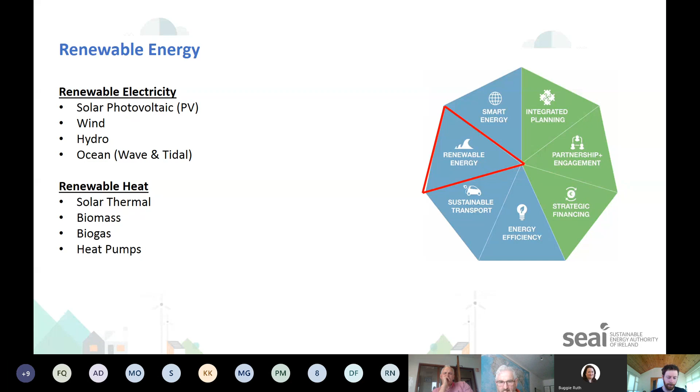Renewable electricity is part of renewable energy, so we've split it into two: renewable electricity and renewable heat. We're going to give a webinar on renewable heat tomorrow, but today we're going to focus on renewable electricity, because there's so much in renewable energy we've decided to split it into two. So when we talk about renewable electricity, in general terms we're talking about solar photovoltaic, wind energy, hydro, and then ocean, wave and tidal. If you want to join the webinar tomorrow on renewable heat, we're going to talk about solar thermal, biomass, biogas, heat pumps, and a little bit about district heating also. So we'll plough on now with renewable electricity.

So when we're talking about renewable energy in the community, in broad terms, this is what it might look like in a small village in Ireland. You can see at the bottom right of the picture, your community might look to install some solar PV panels to generate electricity, and it can work very well in petrol stations, 7-day shops and cafes. Then some of the homes in the village might look at installing solar thermal for their domestic hot water requirement. The local hotel or large B&B might look at a biomass boiler, and the local farm might be a location for a biogas plant, which could then produce gas for heat, fed into a number of homes in what we show here as a small district heating scheme. District heating just means you can use one boiler instead of 10 separate boilers for each home. Then another set of houses might decide to install heat pumps, but they would have to ensure their home is of sufficient energy rating and air tightness, so they might need external insulation or roof insulation to make the heat pumps viable.

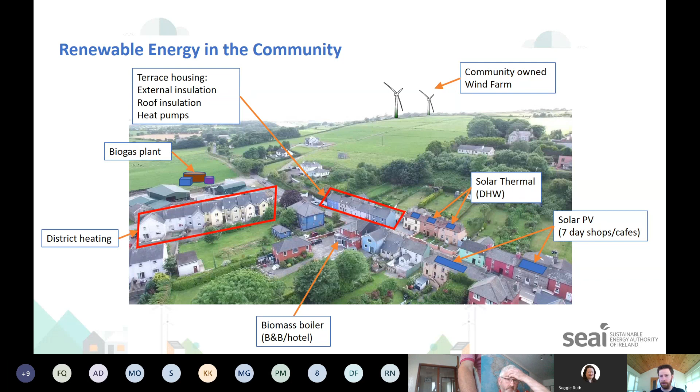As the community develops these small scale projects, they might then look towards something larger, like a community-owned wind farm, and we're going to talk a little more about that through the new Renewable Electricity Support Scheme. Not all communities are inland, some are on the coast, so there's been a lot of discussion in the news about offshore wind farms being the next big part of renewable electricity generation in Ireland. There's also the potential for wave generators and tidal generators. I'll talk a little more about them, though they're not fully mature technologies, towards the end of the presentation.

So just a little bit about targets and policy and why we're doing what we're doing.

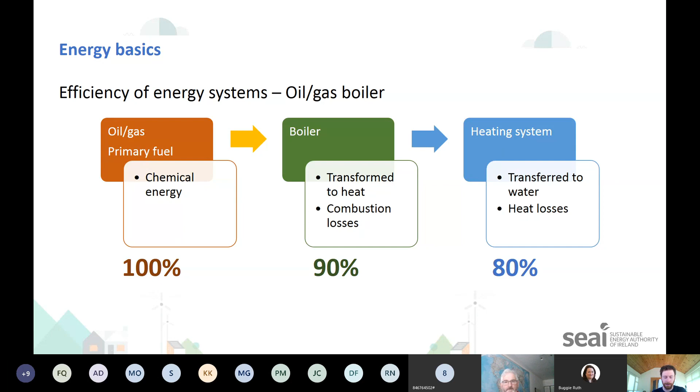Just to give another example in terms of electricity generation, this is an example for a wind turbine. On the left-hand side you have the kinetic energy of the wind, and theoretically there's 100% energy in the wind. As it passes through the turbine, there are usually only 3 blades that can capture that energy, and we have some aerodynamic losses there, so you go straight away from 100% energy in the wind to 55% collected by the wind turbine.

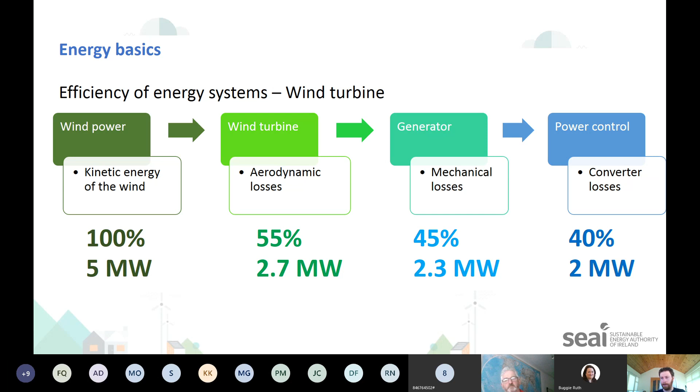The wind turbine then has to take that energy into the generator, and again there are some mechanical losses. From those mechanical workings of the wind turbine, you have to provide electricity to the grid in a usable form - you can't just spill it onto the grid, it has to be suitable for intake by the grid. Once it gets to that stage, you only have about 40% of the energy left from that potential 100%. So that's a little bit about the efficiency of energy generation.

When we talk about energy units and quantities, these terms are often mixed up: work, energy and power. Work is the provision of heat, light or motion. Energy is what we need in order to do work, and we measure energy in kilowatt hours and megawatt hours, and joules as well. Power is the rate at which work is done, which is energy over time. So if we're talking about the power rating of something, we're talking about a 60-watt bulb or a 500 kilowatt electrical generator - we talk about watts, kilowatts and megawatts for power.

Just to give some typical household energy consumption figures, a typical house in Ireland will use approximately 11,000 kilowatt hours of thermal energy, so heat energy, and then about just over 4,000 kilowatt hours of electrical energy.

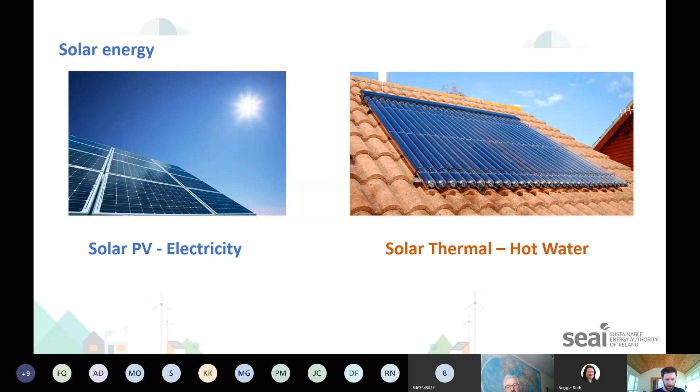Okay, so we'll talk about solar energy. Generally with solar energy, we talk about solar PV or solar photovoltaics, which generate electricity. And then you might see the other ones on the right-hand side of the picture here, solar thermal, which provides hot water. I'll talk about solar thermal tomorrow in the webinar, but now I'm going to talk about solar electricity.

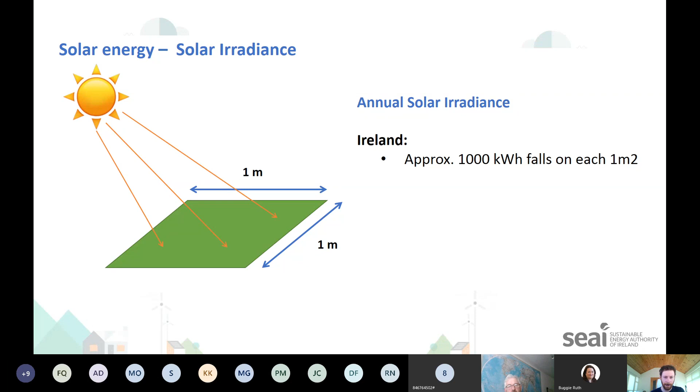So when we talk about solar energy, we're talking about how much of the sun's energy is landing on 1 metre squared of Ireland at any one time. Approximately 1,000 kilowatt hours falls in every 1 metre squared in Ireland, and it's our ability to capture that energy into a useful form that's really key.

This table just shows, depending which way your solar panels or the roof of your house is facing, the ideal scenarios for how you should install solar PV panels. So ideally they should be installed, I've highlighted in orange here, at a 30 to 45 degree angle, which most roofs will be in and around that angle.

And obviously you want it to be south facing. You can see there on the right hand side of the table, the north facing, the last column. Even if it's the right inclination, you're only going to get 500 or 600 kilowatt hours of energy, and it's not really enough to make a solar PV installation viable. So you're looking for that south facing 30 to 45 degree angle. Southeast, southwest is fine as well.

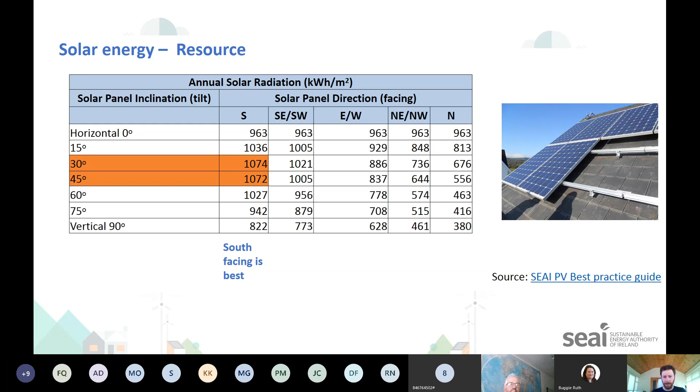And then just some of the considerations. Solar energy is intermittent, but it is predictable. It can be used to supply your hot water in the summertime, and it suits a high summer electrical demand, which many buildings will have through cooling or refrigeration processes. It doesn't really suit space heating because of the amount of thermal energy required for that.

It doesn't suit schools because schools obviously are on summer break, and they're on even a longer break now. But again, there's potential there through possibly the microgeneration scheme, when and as it gets developed, that schools could find an alternative source of income through installing solar PV on their roof and then supplying that to the grid and generating income.

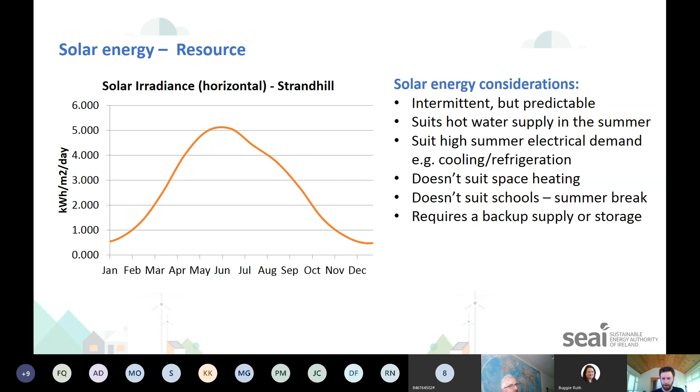So just to give an example then of solar PV electricity: it is generally made of semiconductor material, silicon, and it converts light into electricity, and it's about 15 to 20% efficient depending on where the panels are or the type of panels that are manufactured.

It can either be installed on roofs or in fact on the ground, and you also need inverters to change the direct current electricity, which is how it's produced, into alternating current energy, which is what the grid wants and what your house wants.

So just the capital costs: a small system might cost about 1,500 to 2,000 euro per kilowatt peak, and a larger scale system might cost 1,000 per kilowatt peak, for obvious reasons, for economies of scale in that. It has low operation and maintenance costs, and at the moment SEAI are giving out a grant of 3,000 euro for domestic solar PV systems that include a 4 kilowatt peak system, and it includes a battery as well. And then through the Sustainable Energy Communities Energy Grant Programme, there's potential for between 30 and 50% for a non-domestic setting.

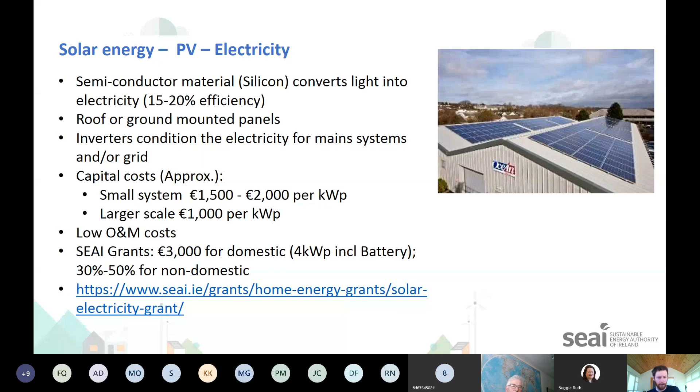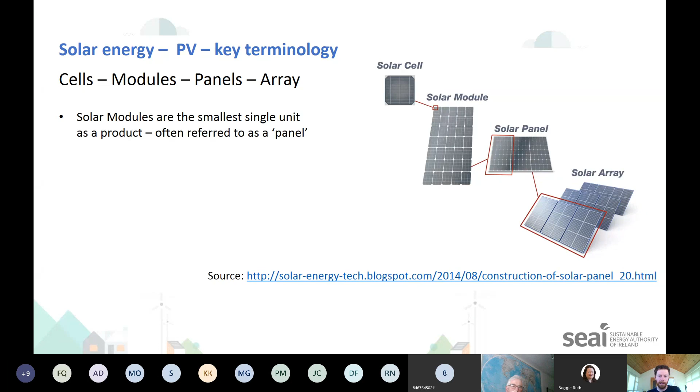Again, when you're considering solar PV electricity, you might want to consider some energy efficiency measures first. This is just some of the terminology around PV panels, the cells, the modules, the panels, and then the arrays. So you can look at that in your own time, I won't dwell on it.

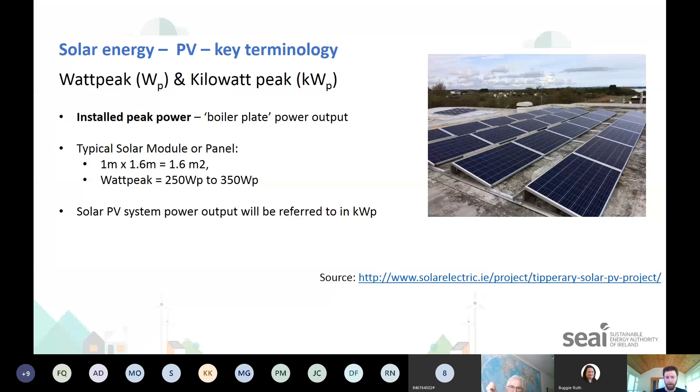And then just in general terms, your average solar module or panel measures about 1.6 metres squared, and in that 1.6 metres squared, it has the ability on a very nice fine summer day to produce between 250 watts or 350 watts of electricity, should the conditions be good or perfect.

Here's an example. If you're conscious that some people are already on the SEC network, some are considering joining, and some aren't on it at all, they might just be interested in looking at this presentation. But if you are a sustainable energy community, or thinking about it, you're likely looking at carrying out an energy master plan for your community.

Within that energy master plan, you can get your energy consultant to identify the best sites in your community for solar energy. You can identify and rank the best potential sites and buildings, such as 7-day businesses, places with summer demand, shops, hotels, nursing homes, even swimming pools. Then that consultant can look at a basic solar PV specification and commercial estimation, and if that comes across as a viable investment, you can talk to those building owners and see if they want to participate in the SEC.

And this is how you start to form a community project. That's just an example of how you're linking up some of the different competencies that we talked about at the start.

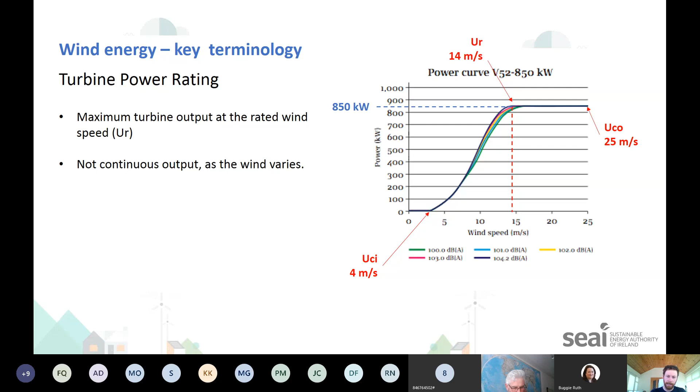Obviously the wind speed can increase up to 15, 20, 25 meters per second, but the turbine will still only produce 850 kilowatts between wind speeds of 14 and 25. After 25 meters per second it's too dangerous - there's too much load and torsion happening on the turbine, so they will turn that turbine out of the wind as best they can, and it becomes unusable. So it just gives you an idea that at different wind speeds, different power is produced.

Capacity or load factor is often talked about. So again, we talked about the theoretical amount of power available in the wind, but how much of that are we actually capturing at any one time? Theoretically, an 850 kilowatt turbine operating 365 days a year, 24 hours a day, can technically or theoretically provide 7 million kilowatt hours per annum, if there were perfect conditions. But in fact, the actual output is about 30% of that.

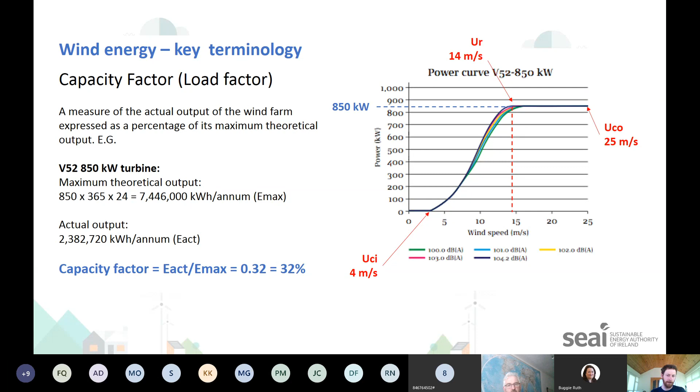And we call that the capacity factor. This is generally the figure for most wind farms, about 32% capacity factor.

Some of the capital costs then, if you think about it per megawatt, can be up to 1.5 million per megawatt - again, it depends on a lot of different factors. Within that, you're going to have an operation and maintenance cost of 1.4 cents per kilowatt hour. So you have to balance that against the cost of what you might be getting through the new Renewable Electricity Support Scheme.

So within the REFIT, the Renewable Energy Feed-in Tariff, which is now closed but is still operating for whoever signed up to it in time, you can see large wind over 5 megawatts will get 7 cents per kilowatt hour of energy produced. This is just some activity you can do if you're looking at doing an energy master plan and your community might be interested in the Renewable Electricity Support Scheme and wind energy.

You might be able to take this into consideration, and it's an example of using the competencies for a renewable energy project or community energy project. So then offshore wind turbines, just a little bit about this. It's no secret Ireland is one of the best resources in Europe for harnessing offshore wind, and the east coast of Ireland has sufficiently shallow water depths to allow for fixed foundation turbines.

Some floating structures are coming into play now. There's some operating in Denmark, so it remains to be seen how well they can cope with the extremities of the sea. In the Offshore Renewable Energy Development Plan, Ireland has the potential to produce up to 4.5 gigawatts, that's 4,500 megawatts, of installed capacity offshore by 2030. That's enough to power about 4.5 million homes per annum. There aren't even 4.5 million homes in Ireland, but it's just to put it into context to say that's how much power is out there, and we should and would be able to export that to Europe in the future.

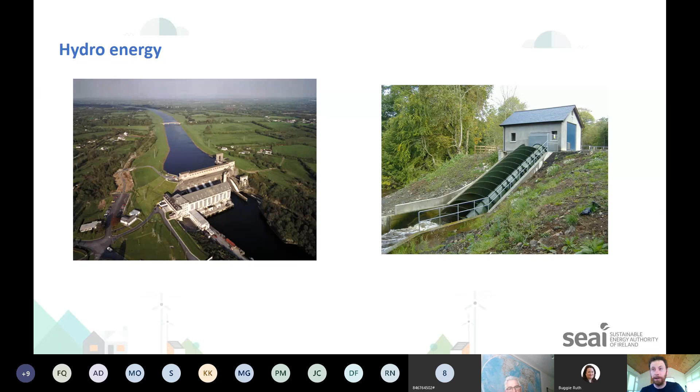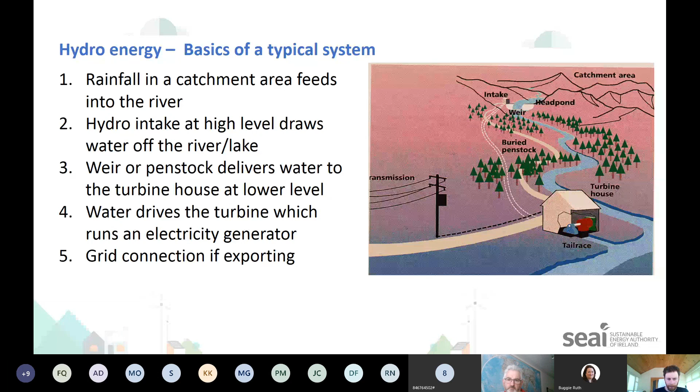So just a bit about the basics of how hydro energy works. The picture on the right shows the catchment area, the intake, the head pond, the weir, the buried penstock, the turbine house, the tail race, and then right down to your transmission. You have rainfall in your catchment area, maybe up high in some mountains, which feeds into a river. The hydro intake at a high level draws water off the river or lake that has been formed, and then the weir or penstock delivers that water to the turbine house at a lower level. The water drives the turbine, and that's how we generate electricity, which is then exported to the grid.

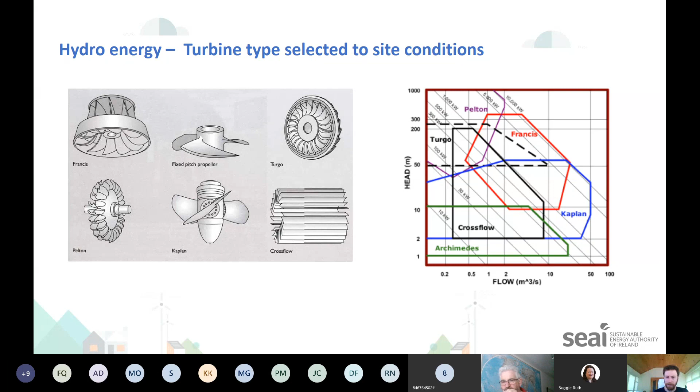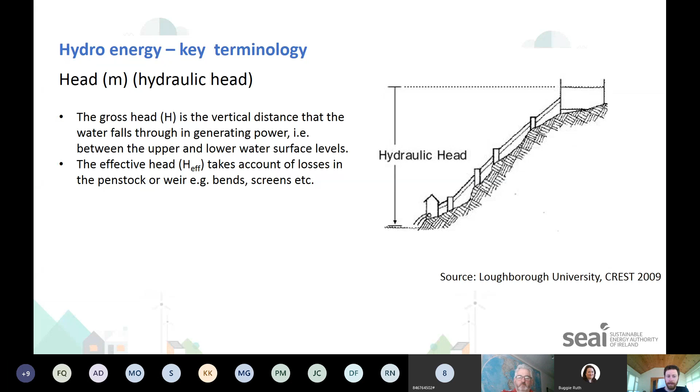What are we talking about when we talk about the head height, the hydraulic head? It's the vertical distance that the water falls through in generating power. The effective head takes account of losses in the penstock or weir, such as bends or screens. And obviously, any hydro power station is very much reliant on the flow of water, which is the amount or volume of water passing a given point at a given time.

There's some very useful information out there through the EPA and our hydrometric stations, if your community is considering it. It's at the moment thought that the majority of potential for large-scale hydro projects has already been developed in Ireland, but there may in fact be some suitable sites for smaller scale communities or small towns and villages in Ireland.

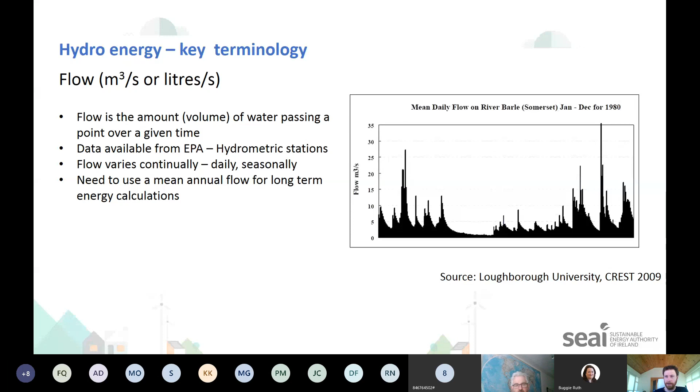So again, depending on the time of year, your hydro plant will produce a lot. Obviously, if it's raining a lot, more water, more flow, more energy, more electricity produced. So when you're designing these things, you have to consider everything, like what the water flow is going to be in that river in general across a number of years.

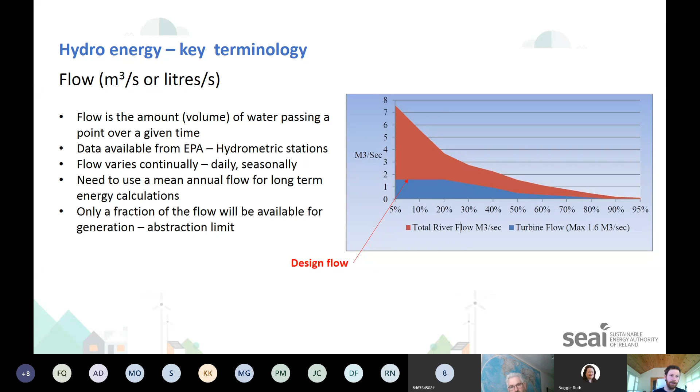And again, we talk about the load factor. What's the potential for a 50 kilowatt hydro turbine to produce: 50 kilowatts multiplied by 365 days per year by 24 hours gives a potential to produce over 400,000 kilowatt hours of energy per annum. But the actual output is more likely going to be something like 200,000 kilowatt hours. So we talk about hydro energy having a load factor of about 45%.

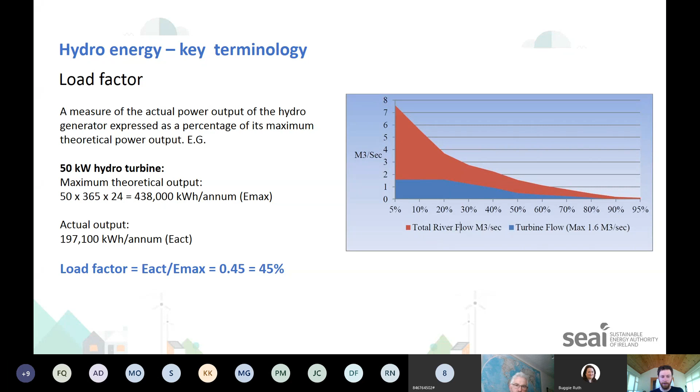Okay, so just some basic average examples given here. And again, there's some activity that your SEC might look into if they are in fact interested in hydro, and an example of linking the different core competencies in developing a specific community renewable energy project.

So just to talk about what wave energy is - it might seem obvious, but it's based on waves formed by winds blowing over the surface of the sea, and the resultant kinetic energy can be harnessed by wave energy devices. Obviously the best wave resources occur in areas where strong winds have travelled over long distances, such as Western European coasts.

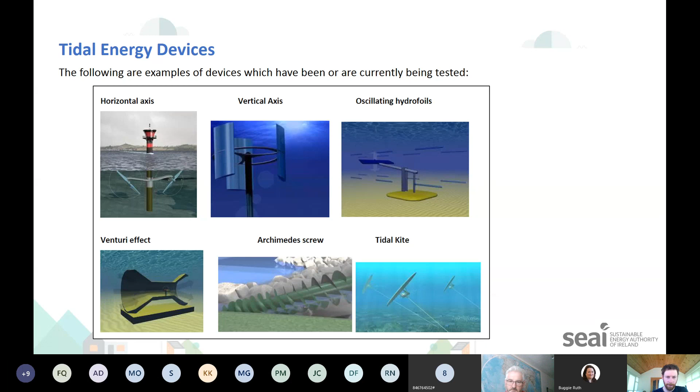So that's it from me. I am now going to hand over to my colleague Mel, and he's going to talk about the origins of electricity, from an Irish point of view.

You're on mute there, Mel. I can hear you now. I'm going to go on mute. Mel is on mute, he's still on mute, he's just taking himself off. There he is - can you hear me now? Yeah, okay, can you see my slide? Yeah, you haven't put it to full presentation. We can see the PowerPoint. Okay, perfect, there it is now.

It's just a little break from some of the technical elements that Stevie would have been discussing. Try and bear in mind the questions you had, and try not to forget them in this intro. So this is a short story around the vocabulary we use, the words we use about electricity and electrons and electronics. And it starts with an Irish link.